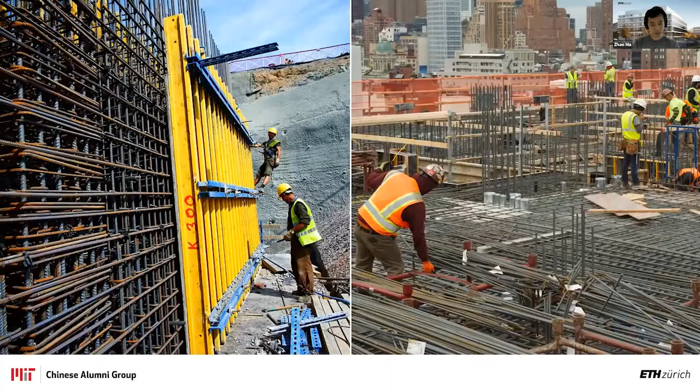However, when we appreciate these wonderful human creations, few of us recognize how they were actually built. If we look into it, the building and construction process is a bit messy and quite labor-intensive. For the non-standard modern ones, the process is even more complicated and costs a lot economically because of the non-standard panels and individual components.

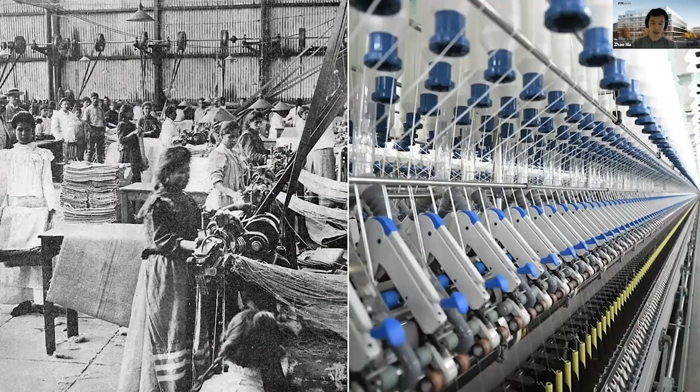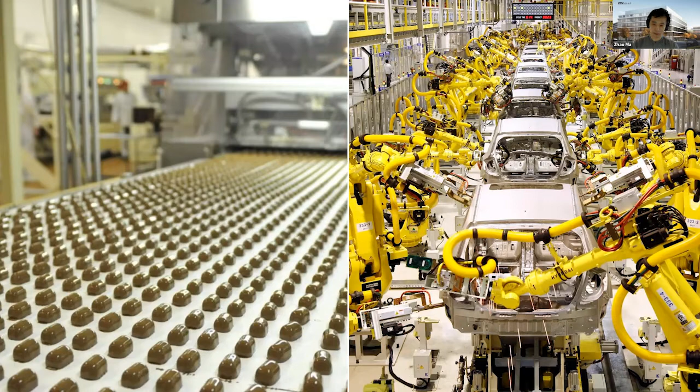But looking through history, many industries have already upgraded their manufacturing process with machines and robots. Taking the textile industry, for instance, it has replaced thousands of workers with modern automated machines, and nowadays only a few workers can oversee hundreds of machines at the same time. If you look around, many daily products, small as a piece of chocolate or as complex as a car, are all made by machines, more or less automatically. So the question here is: is it possible to produce or make a building in this way?

Actually, architects never stop trying to experiment with the idea of making architecture in the product approach, which we call modular construction. But the fact is, when we do this, the design side is very limited. The standardized modules do not fulfill the inner design goals of designers and architects to build those crazy or organic shapes.

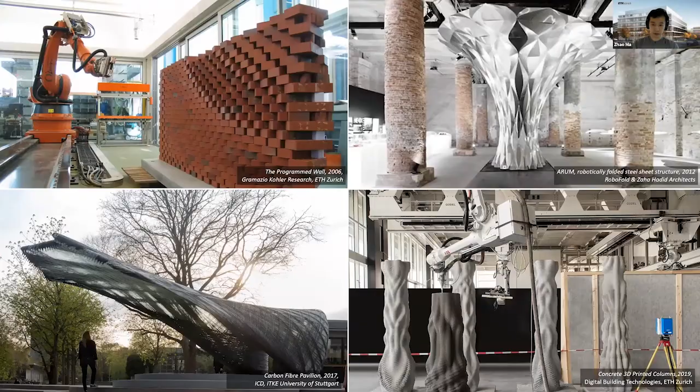Until around 15 years ago, with the materialization of robotics and control systems, an ongoing trend emerged inside the field to digitalize the manufacturing process of these architectural components while still maintaining the diversity of the design.

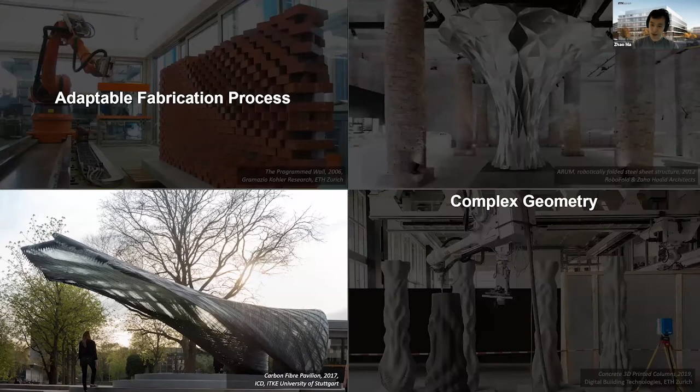Generally speaking, throughout these projects, research discovered that using robots for architectural construction poses several special challenges. The first is the need for an adaptable fabrication process to suit individual unique components. There's also a need for processing complex geometries rather than simple boxes and straight, flat sheets. And, based on different projects, we also need to account for several fabrication constraints, including material strengths and robot reach, which limit how we materialize our design from computer screens to physical reality.

So how should we respond to these challenges? One thing I've learned from past experience is that when there are multiple options presented in front of you, always choose the hard one. So my personal response to these questions during my PhD was clay, for three properties it enjoys: the wide application across different scales, including arts and crafts and architecture; the difficulty to manipulate precisely by machines; and the sustainability property, which we need a lot for carbon emission control.

So in a comparative manner, robotic milling has been widely used for manufacturing hard materials precisely, but it is usually not possible to mill soft water-based clay, as the spindle will push the material away and prevent control of the quality in a very high precision manner.

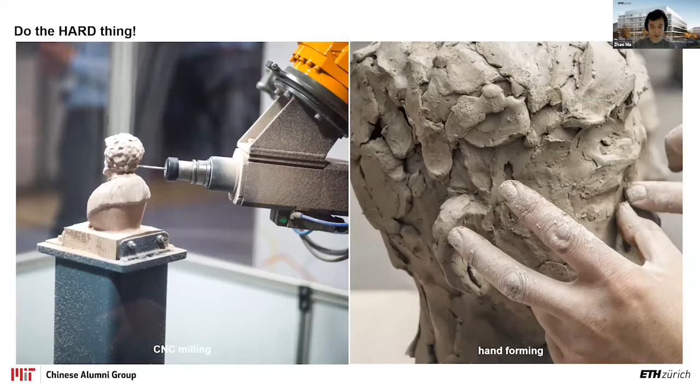So the question to ask here is: is it possible to combine the precision of the machine with the flexibility of human hand to create clay artifacts with fine details? Additionally, is it possible to embed the user's design intention directly into the fabrication process, rather than just copy-milling a virtual product from the computer screen to the physical reality?

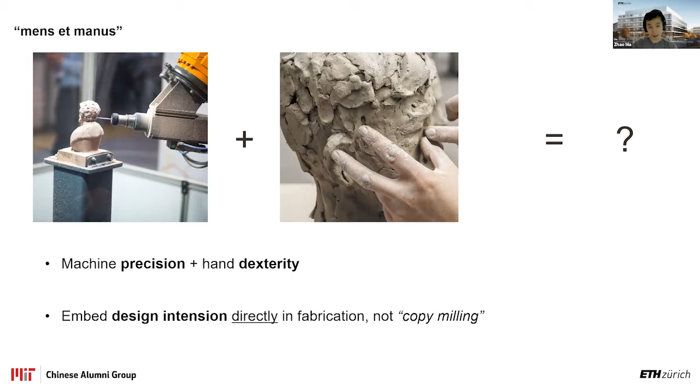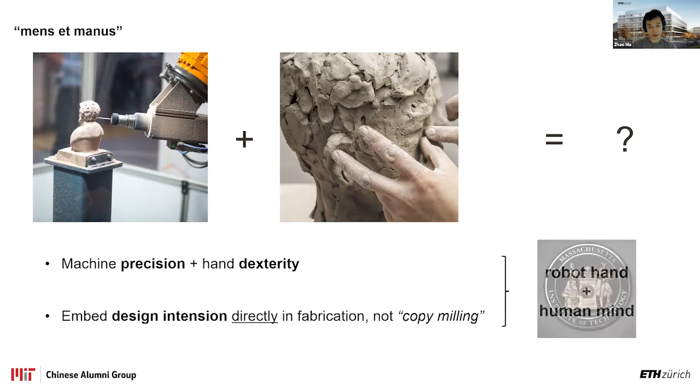And what these two questions are actually asking is to use the robot as our hand, commanded by our mind. And yes, you may think this echoes the MIT motto, mens et manus, mind and hand.

So technically interpreting it, we want to transfer the movements of human hands into robot motion by preserving the idea of the human mind. To achieve this, we need a proxy media that we can use to transfer the design information into the robot command, and two challenges here need to be managed.

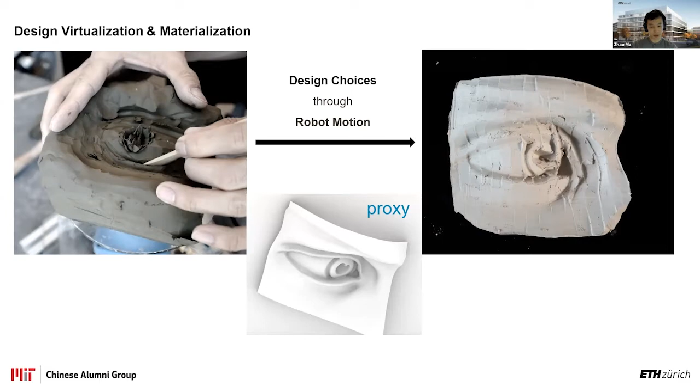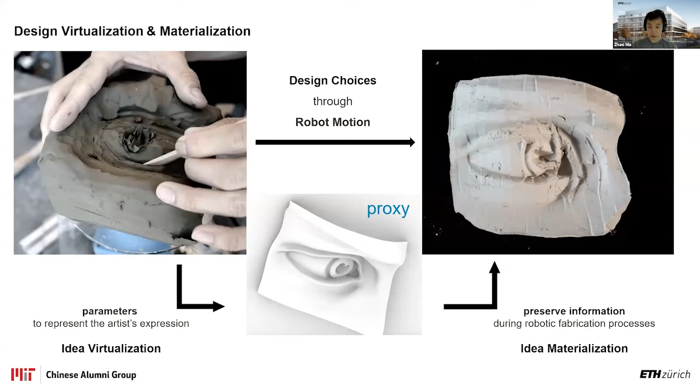First, we need to digitalize the sculpting process by abstracting certain factors that can represent the designer's expressions. Second, we need to carry this information to the robotic sculpting processes.

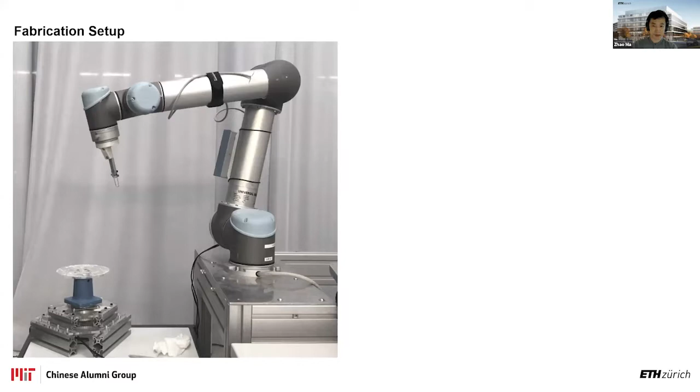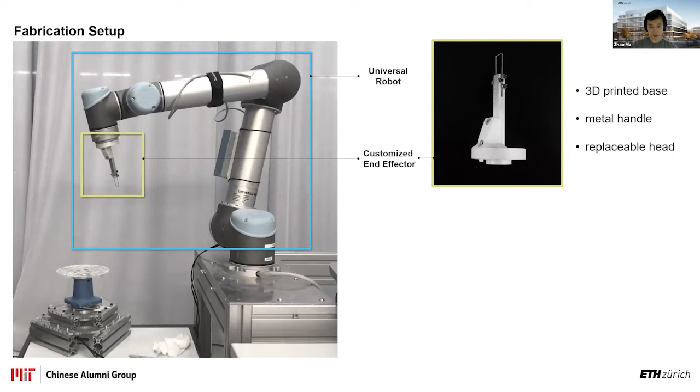So before we dive into the detail, let's look at the tools we set up. The fabrication tools include a universal robot, a standardized robot arm, with a customized end effector composing a 3D printed base and metal wire handle, and an Arduino-controlled customized turntable to enlarge the reachability of the robot.

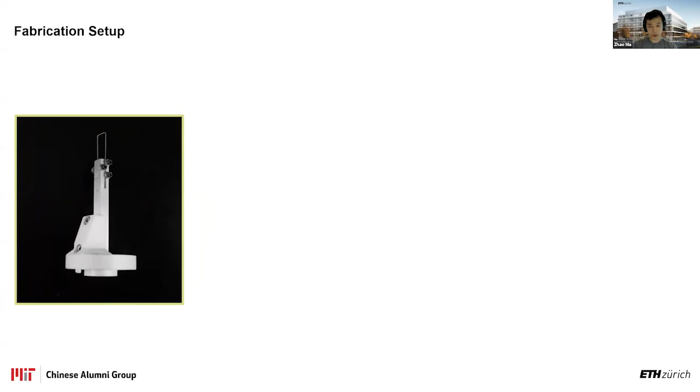For this tool, I imitated professional sculpting tools used by human sculptors and used a desktop wire bender to bend various replaceable shapes that can be attached to the tools.

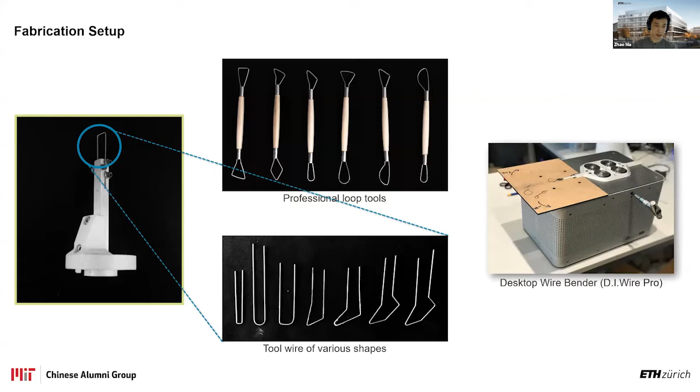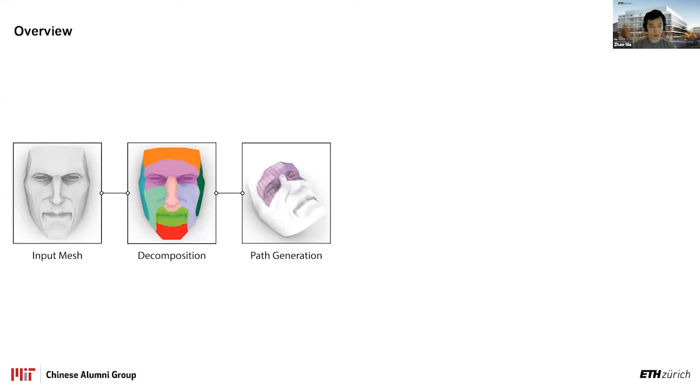Okay, here is the whole design to fabrication pipeline overview. From the input models, I first decomposed the whole model into several patches and generated tool paths for each of them. These tool paths are then sent to the path planning framework to generate robot trajectories, which can be executed by our robot on the physical model per patch.

And in the end, we'll get an output model that is physically realized in clay, implementing our design ideas and expressions through the sculpting process.

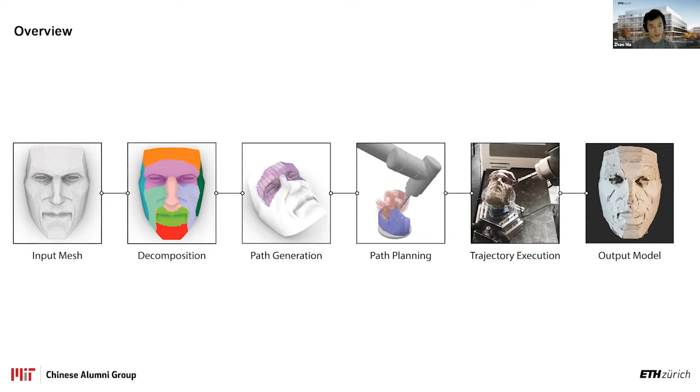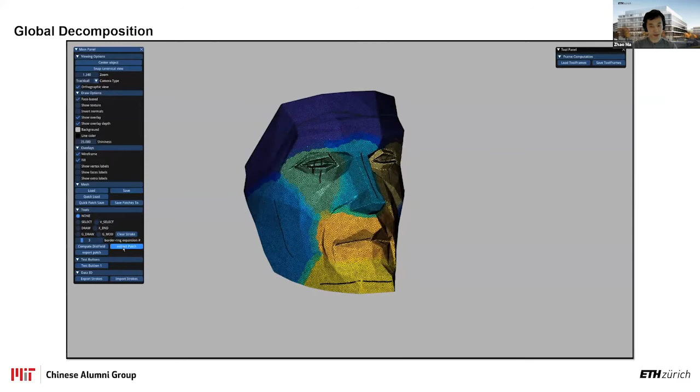Here I developed an intuitive interactive environment or software for the decomposition process. The user can freely draw scribbles on the mesh like drawing on a piece of paper with the mouse. The software will then decompose the mesh in the background based on the strokes. The user can additionally draw further strokes to modify the shapes and patches interactively.

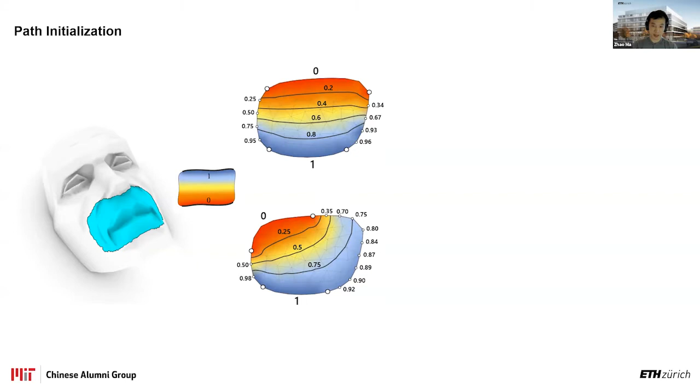After these patches are generated and decomposed, the toolpaths are generated on the patch level using algorithms in the background. The toolpaths contain a set of trajectory points, each of which defines the tool's positions and orientations.

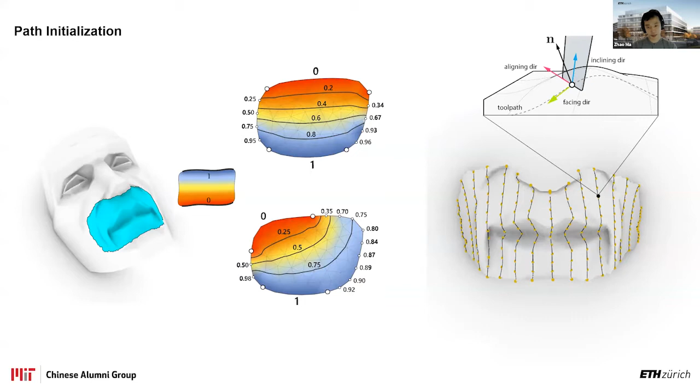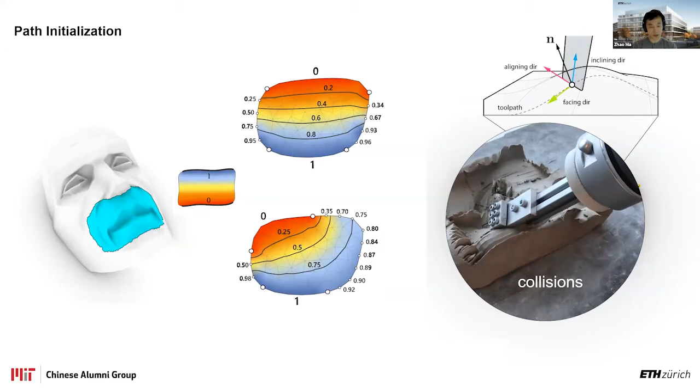But notice here that at this point, if we directly run these toolpaths on the robot, we will have these kinds of collisions, because the toolpath doesn't avoid collisions between the robot and materials. That's why we implemented this path planning framework, which builds a mathematical optimization problem to solve this issue.

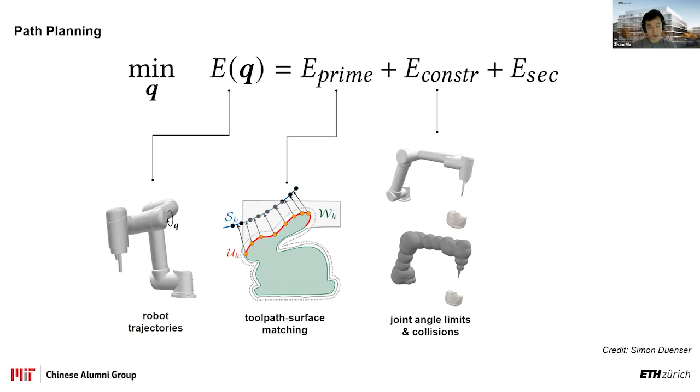We optimize the robot trajectories by evaluating the distance between the toolpath and the target surface. We also implemented constraint objectives to avoid joint collisions and joint angle limits. There are also some other objectives that try to improve the quality of the final results.

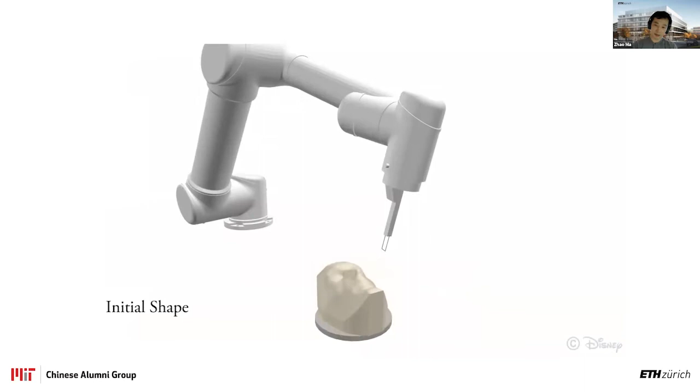And here is a demo of how the optimization takes an initial shape, generated patches and toolpaths as input, and sequentially runs over each patch to find the robot trajectories.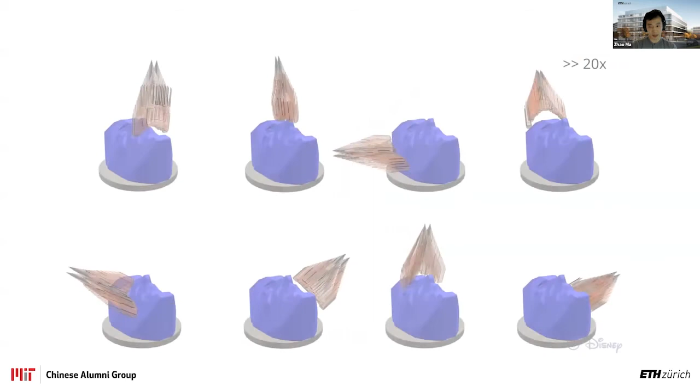We run the optimization, or the path planning process, for each patch individually and store the results separately to allow independent fabrication of different sub-areas of the model.

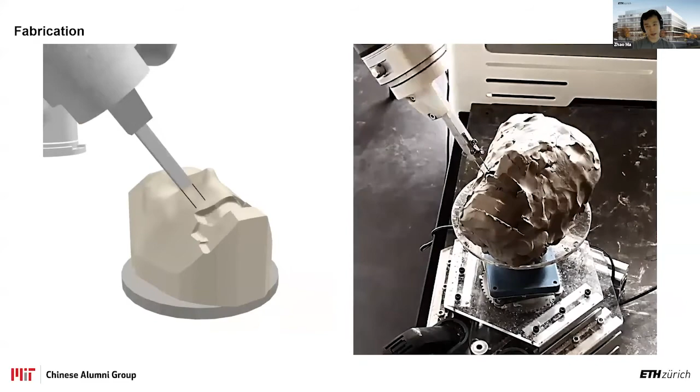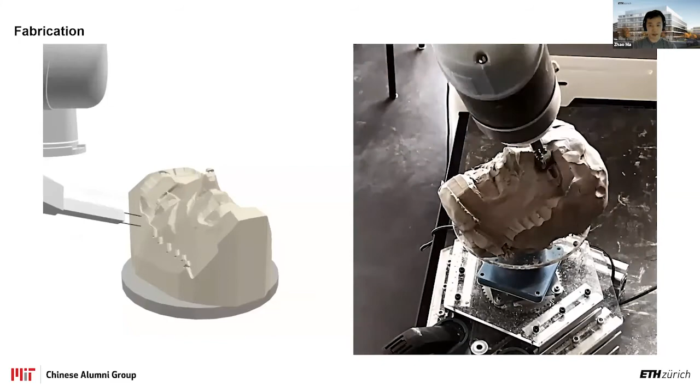And after the optimization, we execute the trajectories on the robot. This video here shows how well the fabrication process matches our optimization results. You can observe that the nose fell off during the fabrication process.

And this is actually thanks to the property of the clay—we can just reattach a piece of clay and resculpt it. This would be a huge disaster if we used CNC milling on a piece of hard material, as the whole piece would break apart and we'd need to start all over again.

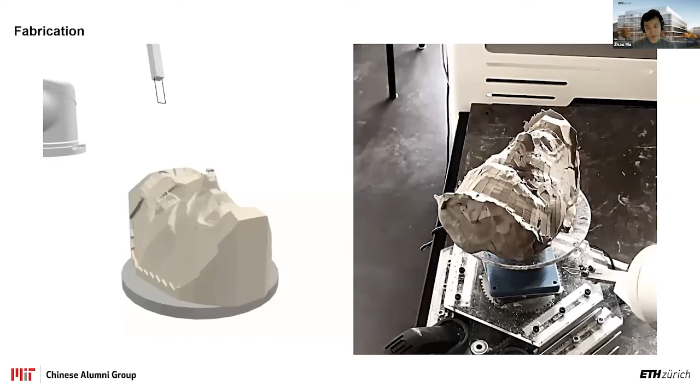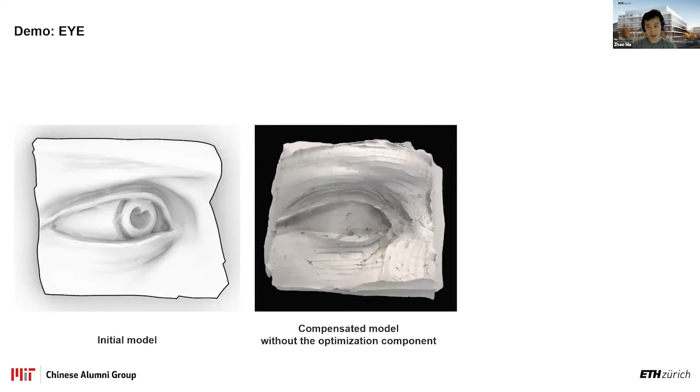And here are some models I sculpted using the system. The eye demonstrates the success of sculpting the highly curved iris areas, which cannot be achieved without the optimization method.

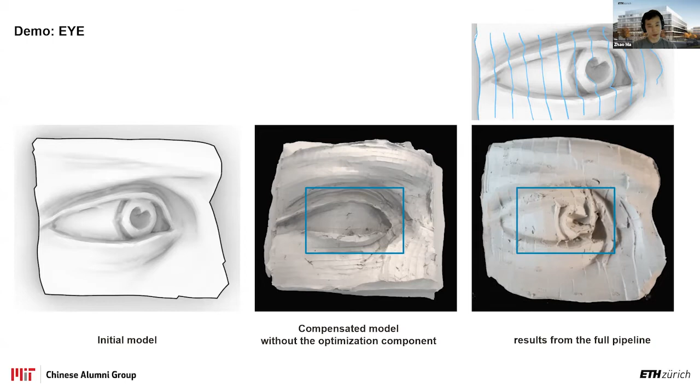Especially notice here, right—I only need to provide very simple toolpaths designed by the designer, and the optimization of the system will do all the dirty work behind the scenes, and the robot will fabricate those toolpaths.

This is a live video showing the quality and the details of the fabrication results, showing the path results at this time.

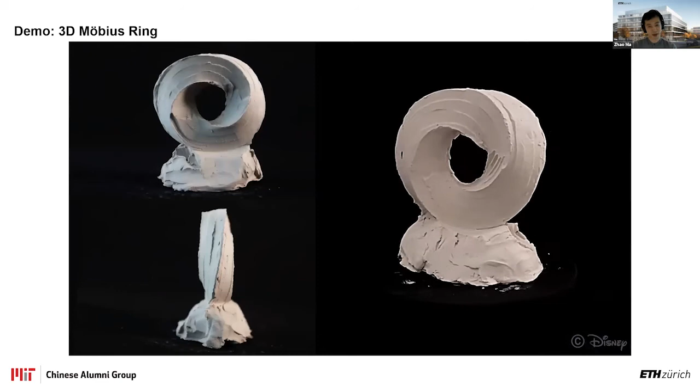We also work on this 3D Möbius ring, which is a truly 3D object and challenges the reachability of the robots and the whole system. Here, the robot arm runs in space in different positions and tries to sculpt the whole thing in a piece.

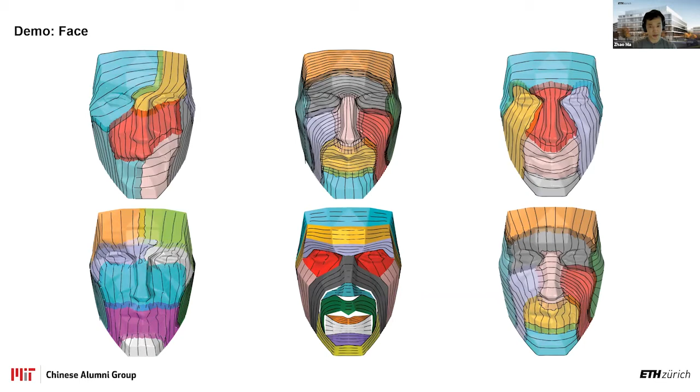Additionally, to stress test the power of the design tool, I created different sculpting styles on the same model, where I explored various decomposition and toolpath generation strategies, aiming to transfer these design sculpting styles to the physical artifacts. These styles are all generated from my design interface with ease.

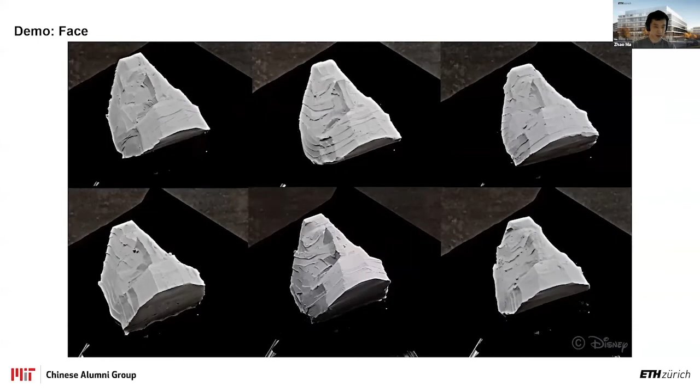At this point, it seems that the physical result is quite stable on the technical aspect, but it feels still a bit far from artistic expression. I want the robot to be more expressive and dexterous.

So I look into the paintings. Throughout history, many famous paintings created by famous artists have different styles. The different styles created by the artist also identify these artists in return. For instance, Vincent van Gogh has very short strokes that you can identify in many of his later paintings.

The idea is to implement these style paintings in 2D in the 3D work I created. With a bit of extra effort, I successfully extracted these styles and embedded them into the robotic sculpting system, with single style, multiple style, and a contrast between different depth and emphasis on the surface.

Okay, let's zoom out a bit and look back to the architectural industries. To this point, this project hasn't touched the application at the architectural scale, but it builds up a computation system that does the hard work of generating adaptive robotic trajectories for complex geometries, considering several fabrication-related constraints of the project.

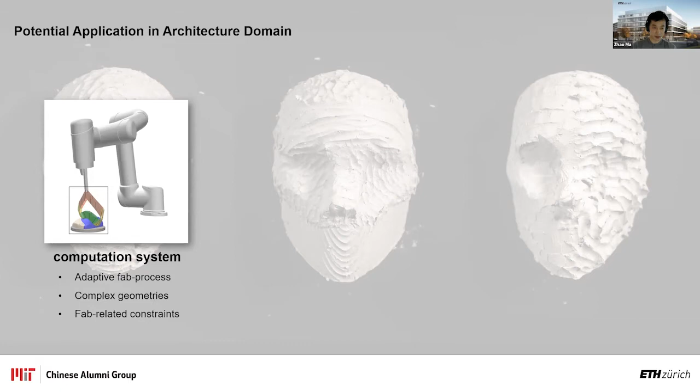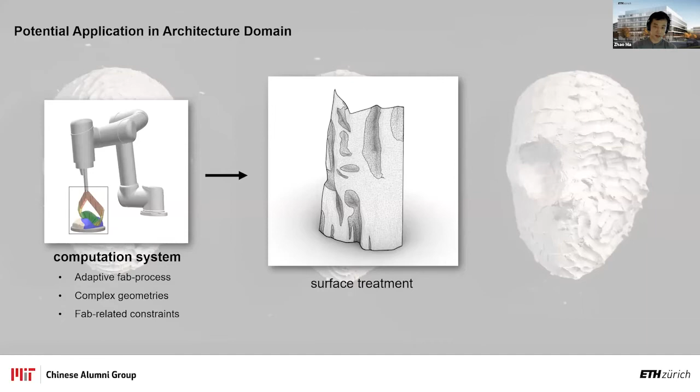I believe it can be easily extended and transferred into other applications, of which I name two here. The sculpting, the surface treatment of large-scale architecture components using the system's detailing ability. And the second one is replacing some of the molding material, since clay is cheap and sustainable.

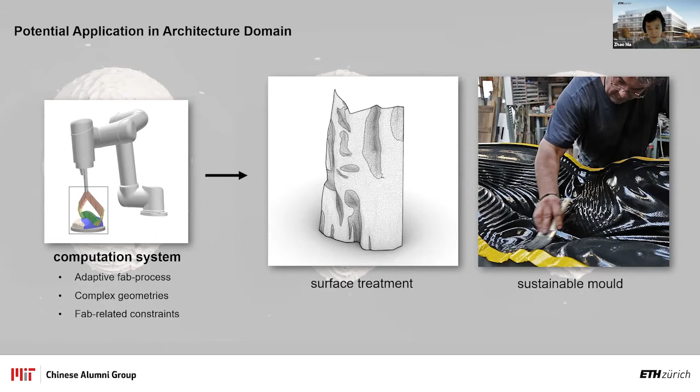And we care about the environment more than any time in history. Generally speaking, my long-term goal is to build different tools as a toolbox so that we can create a Swiss Army knife for architectural robotic fabrication.

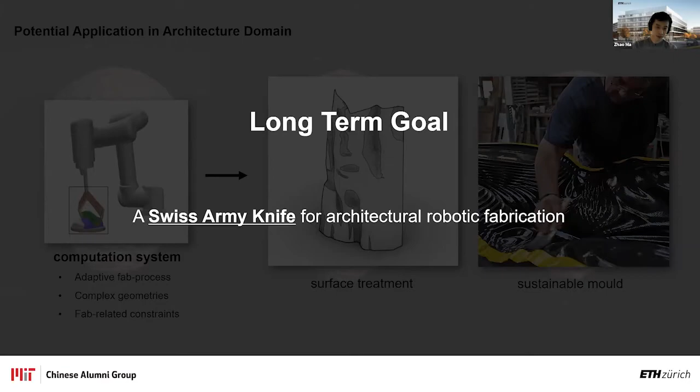So last, I'd like to end my presentation with a quote from Steve Jobs, who once said in a 2011 Apple product announcement, that technology alone is not enough. It is technology married with liberal arts, married with humanities, that yields us the results that make our heart sing.